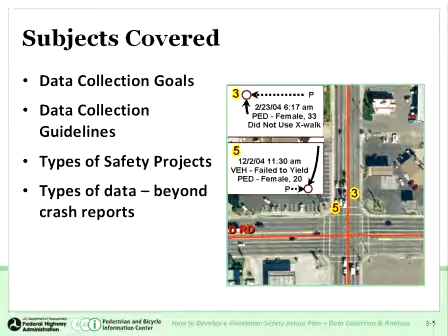Then we have a module on obtaining funding. Where might the funding come from in order to pay for implementing some of these countermeasures, particularly engineering, but also other education and enforcement measures. And then the fact that we need to implement and evaluate the different countermeasures. And all of this is part of an agency's overall pedestrian safety action plan.

So anyway, as part of that, and dealing with collecting data, we need to understand that to really boil all this down into some manageable units of analysis, we like to talk about crash data and looking at pedestrian crashes, where they occur and some of the characteristics, and then locations with a high crash potential. These two goals make up what agencies are supposed to have as part of their overall safety goals, to identify crash problems and then locations and issues that potentially could lead to crashes if we don't do something about it

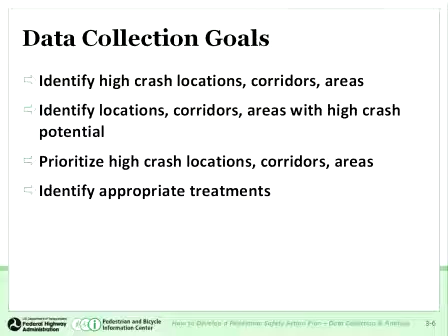ahead of time. So we are going to be talking about high crash locations, corridors, and areas or neighborhoods. These are sort of the three units of analysis that we deal with, not only in collecting and analyzing data, but also in selecting countermeasures. For example, for intersections or spots and corridors, we often talk about different kinds of engineering treatments that can be implemented. When we talk about areas or neighborhoods, oftentimes we may be talking about educational types of programs or even enforcement. But certainly all three of these types of measures are essential ingredients in having an overall successful pedestrian safety program.

All right, some general data collection guidelines that we've come up with are, first of all, we want to encourage everyone to make sure that you conduct your site visits, your field visits, to observe what's going on in terms of behaviors by the pedestrians and motorists, bicyclists, other road users, so you can really get a better handle on why things are happening, why are crashes happening, or why are you getting complaints from citizens about safety problems here. Then only collect what you need. We need to use our limited resources wisely and efficiently for collecting and analyzing data. And so we only want to collect what we can use.

Generally, when you talk about looking at pedestrian crash analysis, you want to collect between about 3 and 5 years of previous pedestrian crash data. If you go much further back than that, sometimes conditions have changed, say from 8 or 10 years ago. So that may not be as useful as your more recent 3 to 5 years of pedestrian crashes. Also, using the crash data certainly is important to help you identify where crash clusters are occurring, whether it's spots or corridors or areas. But then when you get into looking more specifically at some of the high crash locations, that's when it's important to get your hands on copies of the police crash reports themselves. Because reading those police crash reports can also give you helpful information on what's been going on, what kind of situations were occurring, and that can really help you understand the problem and select the appropriate treatment.

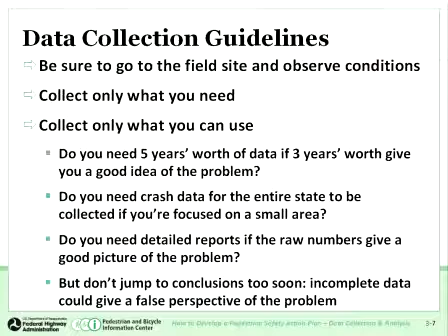And we also add at the end of this slide, we say don't jump to conclusions too soon. Sometimes we may see a few crashes and say, oh, I know what the problem is, but really be patient, go and observe the site, look at the other information, the traffic volume and speed data, other characteristics of the sites, look at the geometrics, and then you can have a better chance of understanding the problem and selecting the proper countermeasure.

Other data collection guidelines: we don't want to miss out on our most recent few months of pedestrian crash data. So if you can get data that's fairly current, you're better off. It's also useful to go back, as I said, at least 3 to 5 years, make use of information from citizen complaints, from police officers, from input you get from other people within your departments. And particularly crash data for the last 3 to 5 years are essential in better understanding what's going on with respect to new businesses in the area, new activities by pedestrians and motorists, the current user groups. Is it near a school? Is it near a senior center? Different travel behaviors by motorists as well as pedestrians. So you want to be able to capture the last few years.

In terms of the types of projects, we are going to talk for a minute about what kinds of data to collect at our intersections or spots or corridors, our neighborhoods, but also within the entire jurisdiction, because there are some kinds of problems that may be common within an urban area. Like if you're in a city within Florida, for example, you may have a high percentage of your population that's senior pedestrians and senior motorists, and that may result in certain kinds of behaviors that may be addressed through education or through some other kinds of engineering or enforcement measures.

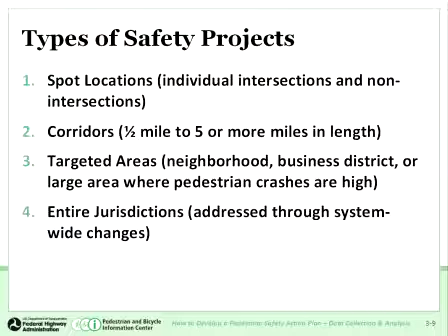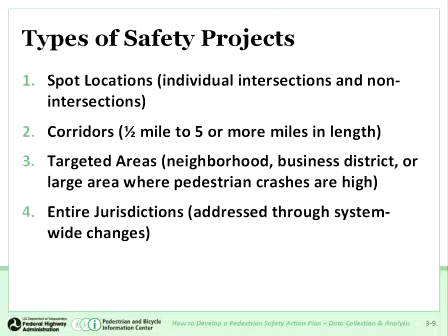Now, some of the types of projects we can talk about: spot locations. When we go out and start looking at sites that either have several pedestrian crashes at intersections like this, or maybe a series of complaints from citizens or others that there are speeding or lack of yielding or unsafe behaviors, we might want to be looking at things like sight distance or the width of the crossing. How many lanes does a pedestrian have to cross from curb to curb?

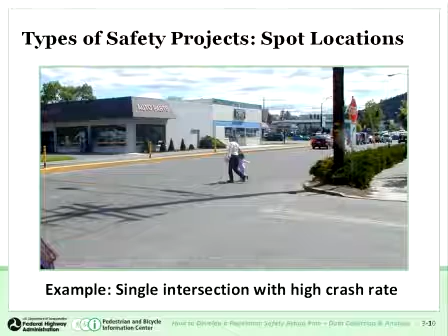Is there any raised median? What are the speeds there? Can we get speed studies? Are speeds too high? Could things be done to lower speeds, either through engineering or enforcement? What about the behavior of some of the users? Is it near schools? Are there children or seniors or other kinds of groups that you may want to address either through education or through some other kind of treatment?

When you talk about corridors, you can see here that there's really no obvious location to add a pedestrian crossing. You can see the pedestrian near the top of your screen standing in the center of this 7-lane roadway, and it may take quite a bit of analysis to figure out what is really needed here. There may not be one location along here that may warrant a traffic signal or even another designated pedestrian crossing. But are there other things that could be considered, like having raised median islands

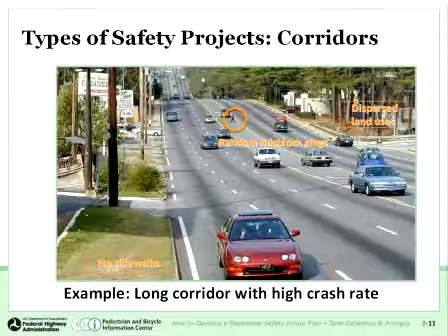or some other kinds of devices to slow down vehicle speeds, maybe reducing the number of lanes through what we call a road diet improvement. Maybe you don't need 7 lanes here. So next time you resurface the road, maybe it can be striped for 5 lanes, possibly with a raised median island for pedestrians to have a place of refuge. So we need to be thinking broadly, even during the data collection process, about the kinds of behaviors and conditions there that might lead to some reasonable countermeasures for pedestrians.

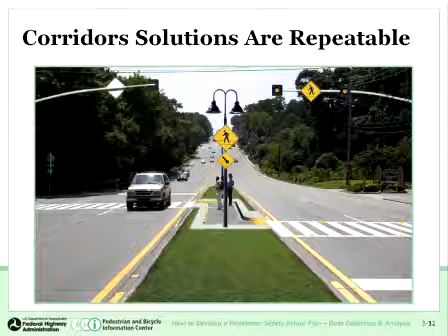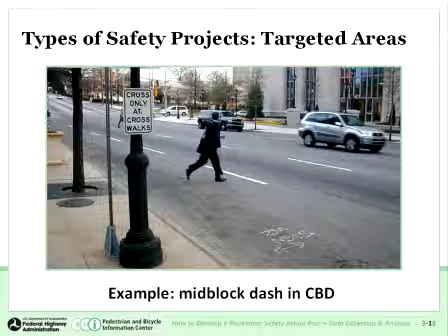There may be areas within an urban area, for example, like this, where pedestrians are running across the street for one reason or another, where there are long distances between signalized crossings, where it's important to really go out and collect just some basic information to understand what's happening. What are the pedestrian origins and destinations? Where are they crossing? Are there things that could be done to make these crossings safer? And what kind of data do we need to collect to help us come to those conclusions?

So a pedestrian may not be able to even see the indication that the motorists see, and a pedestrian may be sort of guessing when it's safe or appropriate to cross the street. So if you have senior citizens or children in particular, that may cause a certain risk for pedestrians, particularly during higher volume conditions or in rush hour.

So looking at intersections like this throughout an urban area where you may have multiple signalized intersections without pedestrian signals, are there some policies or some priorities that can be placed on installing pedestrian signals, you know, where they're needed?

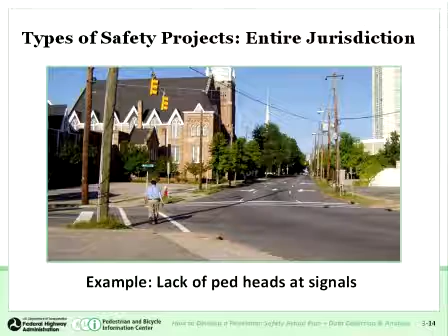Unfortunately, though, in terms of exposure data, many cities don't collect much exposure data. We encourage them to do so. Pedestrian exposure can be very useful in conducting a citywide or area-wide analysis of pedestrian safety. But what we're saying is you shouldn't necessarily wait for all the exposure data to be available before you start with your pedestrian safety program.

It can be useful in computing pedestrian crash rates and things like that, and determining where there are demands for pedestrians, where you can meet certain warrants, like for traffic signals and pedestrian signals, and where there's a need for crosswalks and other crossing amenities.

The other item here says that if a pedestrian safety problem has been identified, you can decide what kinds of data are most needed for that site, so you can begin selecting the appropriate countermeasure and implementing those countermeasures as soon as possible.

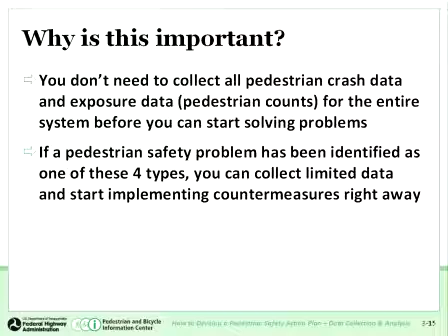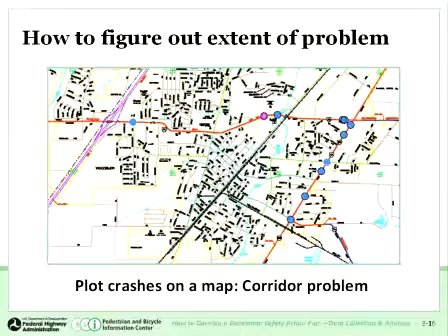And so by looking at an overall visual picture of where the pedestrian crashes are occurring, that can really help you hone in very quickly on where you need to go out and further analyze stretches of highway corridors in this case, and determine what problems are occurring and what countermeasures may be appropriate.

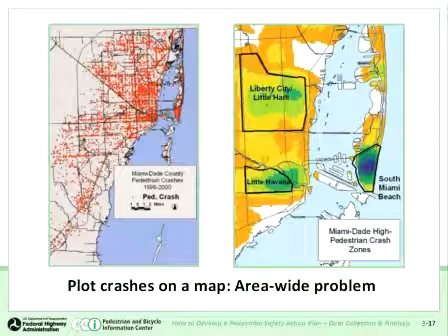And then what we did is we went out into the field, we looked at these sites, walked through them as pedestrians, we drove through them as drivers, and we could get a better sense of what's going on. We also observed pedestrians and motorists for quite some time, to see what may be causing some of the crash experience.

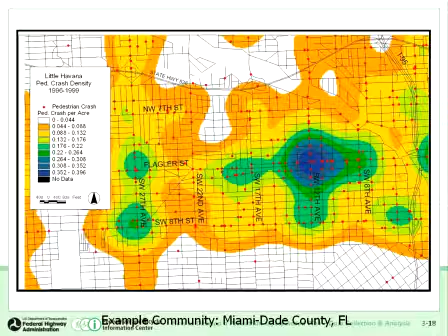Collecting the data to analyze pedestrian crash problems involves several kinds of things. We talked about computerized police data, and we recommend that be geocoded so that the analysts can develop computerized crash maps and quickly be able to target the locations that need further analysis. But in addition, it's important to have some kind of information on the conditions of the roadway, number of lanes, types of traffic control, things like that, as well as the location of sidewalks and walkways.

Knowing the traffic characteristics, traffic volume, the characteristics of turning movements, and percentage of vehicles by type. Pedestrian counts and behavior information is useful, and this should be done at the sites where you go for further inspection. It's important to understand the pedestrian guidelines and policies that your agency has. And are some of these policies contributing to maybe some of the pedestrian crashes?

Are your walk signals timed properly to allow enough walk time for pedestrians? Do you have well-trained adult crossing guards at your elementary schools where appropriate? Do you have an adequate network of sidewalks and walkways for your pedestrians? And certainly making a site visit can help you to understand the answer to some of these questions.

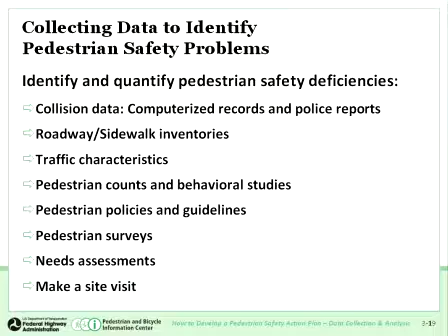Now, getting into a little bit more detail on the collision data, it's important that we do have a full picture of the pedestrian crashes, when they're occurring. We need to get copies of the police report, to read the narrative when we're looking at a location, to review what the officer said about each of the pedestrian crashes. And again, geocoding the crashes is a good first step in targeting where the crash locations are.

When we were further analyzing the pedestrian crash problems in Miami-Dade County, we actually had copies of the police reports sorted by intersection along a corridor. So as we would walk along a corridor, we would stop at an intersection, we would pull out the crash reports for that intersection and review them right there in the field. And then by looking at the intersection, watching the behavior as we reviewed the crash reports, we could really start to understand why certain kinds of crashes may be occurring.

Was there a high left turning movement combined with heavy pedestrian crossing across a certain leg? Were there certain behaviors by pedestrians like walking against the light, or motorist behaviors like speeding or failing to yield that might be contributing to crashes?

There were a couple sites where we even noticed from the police reports that the crashes were occurring in a grocery store parking lot, because it was actually drawn on the police report sketch. So we actually went into the parking lot and watched the flow patterns of the motorists and the pedestrians coming into and out of the store, and it was really obvious they had a very bad flow pattern with poor sight distance, and that was clearly contributing to some of the pedestrian crashes.

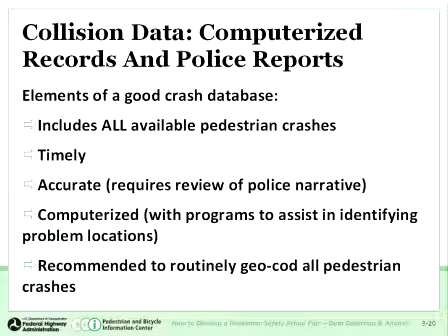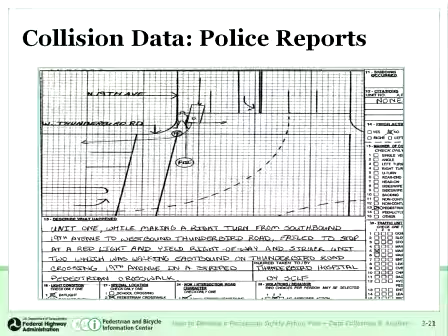And you can see here an example. Looking at this sketch, you can see the right turn motorist that struck the pedestrian that was stepping off the curb. So, what's going on out there? Looking at the site, was there a poor sight distance, or was a motorist looking to the left and not observing pedestrians crossing in front of them? Or are there other sight conditions that might be contributing to this kind of crash?

Now, in addition to having the crash data, it's important to understand where there are missing sidewalk links. Do we have maps or information on traffic flow, the average daily traffic, the street widths? Because we know that wide streets and heavy traffic and high speeds, those combinations of conditions can really present high risks for pedestrians trying to cross.

So also having some idea of pedestrian counts, the ages and characteristics of the pedestrians, how many are crossing, where they're crossing, can also be an important ingredient in your analysis.

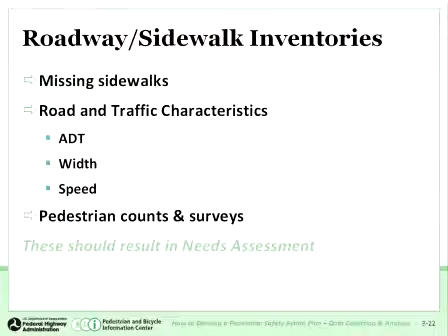And looking at locations like this, where you may have missing sidewalks, and it's pretty clear that if you have crashes occurring during a certain time of day, it's important to go out there during that same time and day of week, if possible, or if it's a weekday problem or a weekend crash problem or a nighttime crash problem, and go out and look at what's going on during those days or times of day, and that can really help give clues as to what is causing some of those crashes.

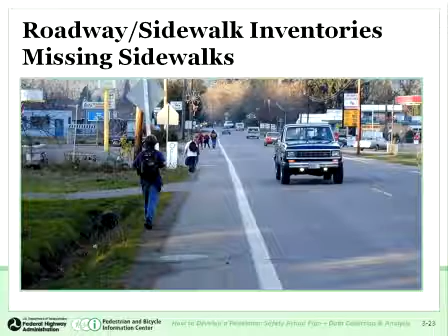Okay, now here's an example of a street, and if you're going out to look at a site maybe that's had a lot of complaints or pedestrian crashes or both, it's important to look for things that may be going on that you can just observe from your vehicle or from standing in the street. Just to give you some examples of things we observed in one of our citywide studies, we had several pedestrian crashes that occurred on a two-lane, fairly low-speed street that divided a pedestrian mall. And so it wasn't really clear to us from the police reports why these crashes were happening.

When we went out into the field, we noticed that every cycle, the walk and don't walk signals would come on at the same time. Now, the engineers told us when we got back to the office that was impossible, but we took photographs and showed him that that was indeed happening.

We had other locations with motorists striking pedestrians on the sidewalk. And we went into the field and noticed that the bushes between the sidewalk and the properties had grown up so tall that motorists exiting the driveways couldn't see a pedestrian until they actually had the front end of their vehicles across the sidewalk. So this was an obvious thing, trim the bushes.

We had another city where we had a lot of pedestrian crashes happening at certain intersections along a major route. It so happened that these were primarily where the buses were stopping, and we would observe pedestrians running diagonally across the street to the bus or getting off the bus, stepping out from in front of the bus into the path of oncoming traffic. So it's really a matter of issues concerning behaviors at bus stops and what are some of the things that could be done to change behaviors or implement engineering treatments there.

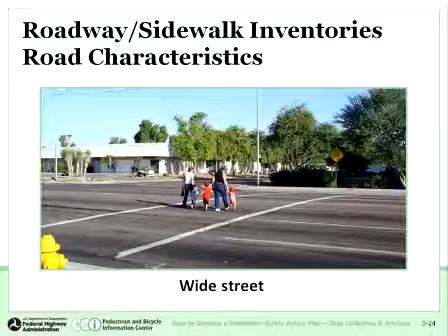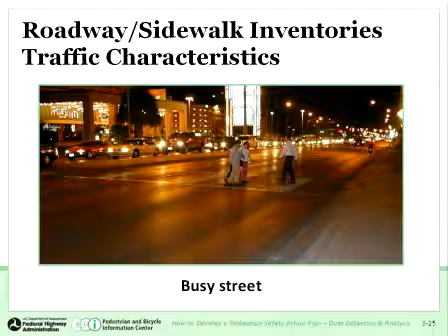You can go out at night and observe certain kinds of behaviors like you see here. You know, are speeds high? Are pedestrians crossing the street at certain locations without looking? Is this even a proper location to have a marked crosswalk alone? Or should there be some other enhancements here to assist pedestrians crossing the street? In many cases we can really understand a better solution simply by observing.

Some of the behavioral studies that we might want to conduct is just observing at a location can lead you to understanding what are the problems. There was another location in one of the northern states not too long ago. It was near a junior high school, and there have been several junior high school kids that have been hit by cars during afternoon school periods.

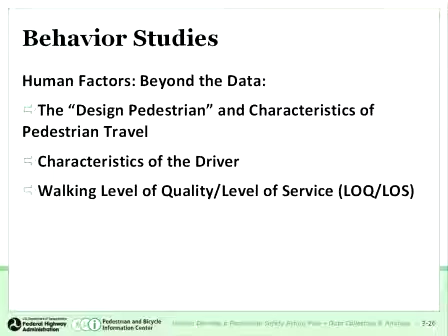And we noticed by observing that they had one older adult crossing guard that was being ignored by the junior high students. They would cross when the guard would tell them not to. The motorists were ignoring the guard and driving right through even though the guard was telling them to stop. And it was really chaos. And it wasn't very difficult to understand why pedestrian crashes were happening. So a number of treatments were recommended there to really try to get control over the situation.

Also looking at what's going on in terms of where and how pedestrians are crossing and how are motorists behaving. When we were in Miami-Dade County and we went to some of the neighborhoods to look at behaviors on some of the high crash corridors, we were in one area called Little Haiti, and we would notice that many of the senior pedestrians would cross these wide 4-lane, 5-lane streets, and they would stand right in the middle of the roadway waiting for oncoming traffic to pass. And many of the vehicles were passing within a foot or two of them as they stood in the middle of the street, and then they would finish crossing mid-block.

We noticed that in some of the areas, very different kinds of behavior. Some of the behavior by the children in Little Haiti and Liberty City were really putting them at risk in terms of running across the street or crossing in unsafe ways, motorists not yielding to pedestrians in crosswalks. So that kind of behavior is important to note to help you understand what countermeasures are appropriate.

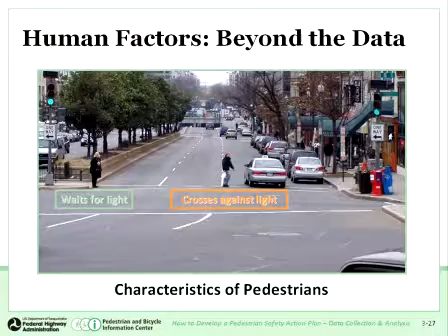We have looked at pedestrian crash problems in many urban areas, and what's common is some pedestrians may walk against the don't walk light, and at the same intersections, motorists may not be observing the legal right-of-way that pedestrians have during the walk phase, and maybe turning left or right across the pedestrian's path. So sometimes enforcement is important, particularly to motorists, to improve their behavior to comply with the speed limit and also with laws requiring them to yield to pedestrians in legal crosswalks.

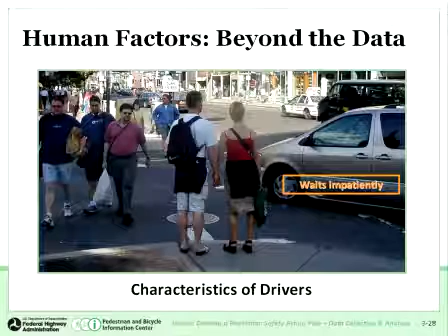Also looking at a roadway situation or corridor that may not be very pedestrian friendly, looking at the quality of the environment for pedestrians, the walkways or sidewalks. Are they being cleared of snow and debris or ice? Do we even have adequately designed sidewalks and walkways for pedestrians? And what about the pedestrian crossings? Are they built in a safe manner for pedestrians to use them?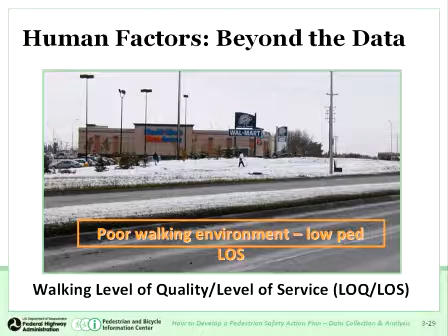And one of the things that we do know from the research is that many of the improvements that benefit pedestrian safety also benefit motorist safety. For example, road diet improvements we've made mention of, where you're reducing the number of lanes from 4 or 5 lanes down to 3-lane roads. Our research shows that crashes can be reduced by about 29% for total crashes. And some of the research we've done for pedestrians on marked versus unmarked crosswalks shows that having fewer number of lanes also reduces pedestrian crash risk.

Just a few other examples of some of the treatments that can improve safety for all road users that can benefit pedestrians. Adding raised median islands gives pedestrians a place of refuge, can reduce pedestrian crashes by 30 to 40%, but also reduce motor vehicle crashes, particularly head-on crashes and left-turning crashes.

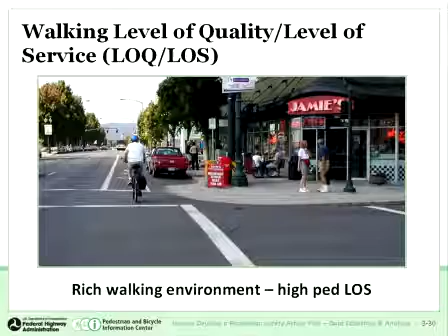So something to keep in mind. Okay, getting into a summary of data collection. Again, we want to think about the spots, corridors, and neighborhoods, as well as jurisdictional issues and problems. We want to make sure to have pedestrian crash data 3 to 5 years. We want to observe pedestrian and motorist behavior in the field and collect basic roadway inventory information, as well as our traffic and volume information and our crash data.

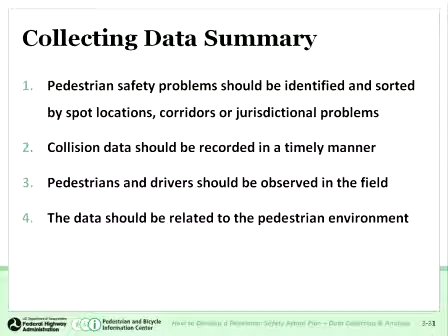But also realizing that you don't have to collect every single piece of information that you would ever want in order to oftentimes identify what is the problem and have that lead to countermeasures. Okay, so essentially we're wrapping up this first module, and we've talked about what and how to collect meaningful data for pedestrians as part of their pedestrian safety action plan.

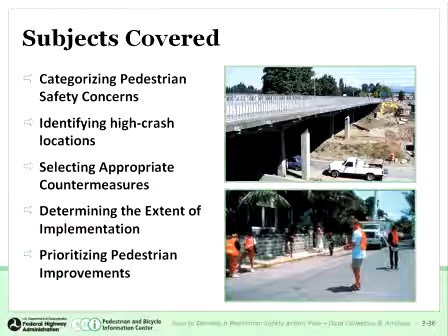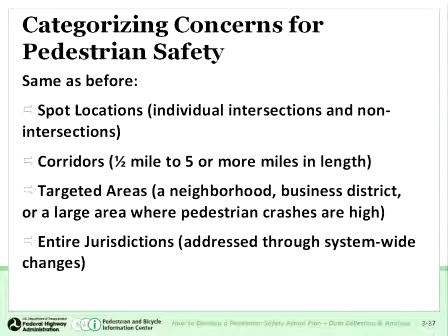And we are going to talk about not only looking at high crash locations and a little bit about some of the countermeasures that may come from some of this analysis, but we want to also talk about the extent by which you can implement some of these treatments, and then the importance of setting priorities for implementation. We know we don't have unlimited funds. We need to make use of the resources that we have to do it in a cost-effective manner. And we are going to look at, again, spots, corridors, areas, and jurisdictional issues.

One of the tools we can use to analyze pedestrian crash data is what we call PBCAT. It's Pedestrian Bicycle Crash Analysis Tool. It was developed largely by the Highway Safety Research Center here at UNC for the Federal Highway Administration, trying to analyze crashes in terms of the type of crash. Things like mid-block dart/dash, turn merge, where they're left-turning or right-turning motorists, walking along roadway crashes, like often occur at night, and trying to take our sample of pedestrian crashes, analyzing them by type, and then this software allows you to not only enter the basic data, but it also has links to appropriate countermeasures for each crash type.

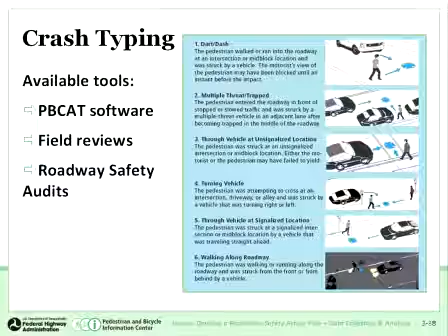Here's just an illustration of what the PBCAT software looks like. We have this information on our website.

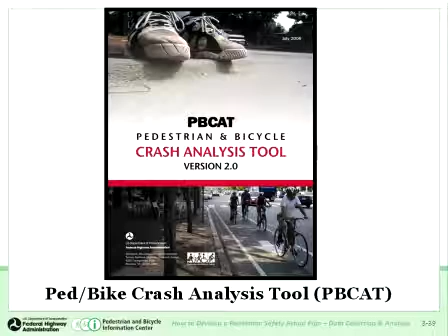This is the PBCAT software, and it allows you to really analyze crashes in a systematic manner in selecting countermeasures. The field reviews, we talked about those some, but we need to summarize the data, whether it's conflict data or you want to analyze the percentage of pedestrians that walk during the walk, flashing don't walk, or steady don't walk period, in terms of reviewing data from the motorist, in terms of speed data, yielding behavior.

And we want to review the site of the crashes or the complaints, not only from the standpoint of behaviors, but also characteristics of the sites, the number of lanes, the speed limit, vehicle speeds, types of traffic controls there, and things of that type. And of course, more data will be needed for sites that are more complex to analyze and have more difficulty in determining the cause.

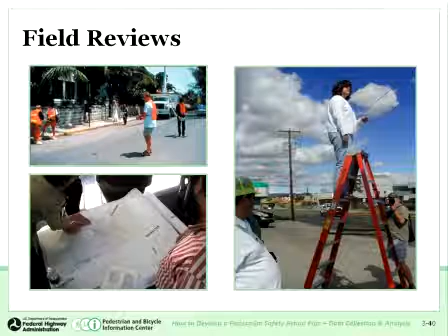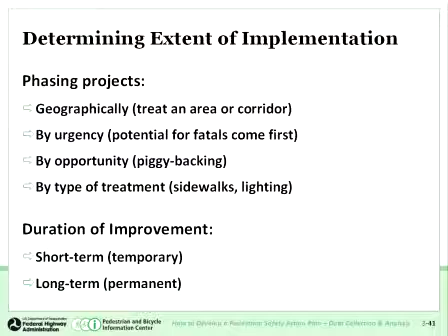We also want to talk about the phasing of implementation, that there are some kinds of treatments that will be discussed in some later webinars that can be phased in throughout an area or neighborhood or along a corridor. We talked about reducing the number of lanes from 4-lane to 3-lane. We can talk about some geographic treatments like educational programs that can be implemented at schools or senior centers.

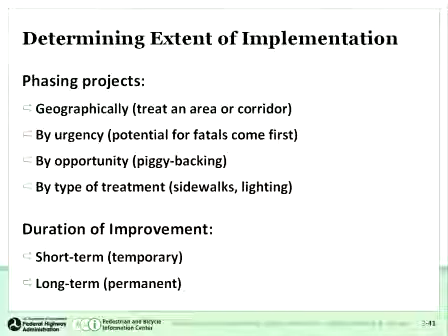We can talk about piggybacking projects where if you're going to have a construction project, here's an example of where an agency installed a number of curb extensions along a corridor. They were actually having a utilities improvement anyway, so they had to tear up the street, and as part of the reconstruction, they decided to install a series of curb extensions which shorten the crossing distance for the pedestrian at certain intersections, and they can also help to reduce vehicle speeds.

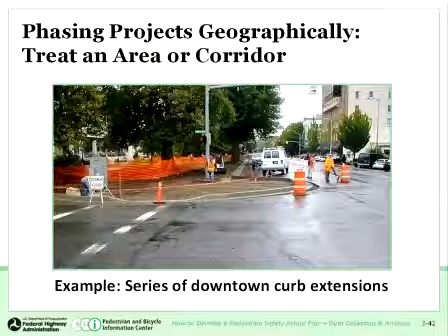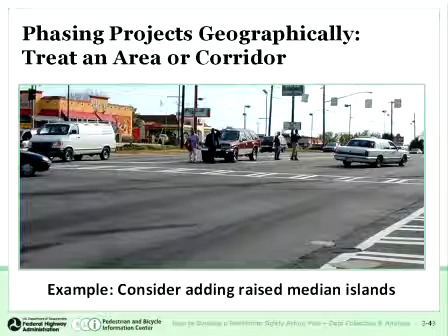Things that can also be done as part of a system-wide improvement are things like different engineering treatments. The city of Orlando, for example, a few years ago decided to systematically replace all of their parallel line crosswalks with high visibility crosswalks. So they decided to phase out the parallel lines and put in the more visible crosswalks. And they actually thought they saved money in the long run because the higher visibility crosswalks lasted so much longer. So you can make implementation of some of these treatments on an area-wide or system-wide basis throughout your city or town.

Other treatments like adding a bridge. Well, that's a great opportunity to add your sidewalk or walkway for pedestrians, because otherwise if you build a new bridge and don't put it in, then it probably is not going to be ever added to the bridge. And you want to make sure that pedestrians are provided on bridges and other facilities to reduce the chance of collisions in the future.

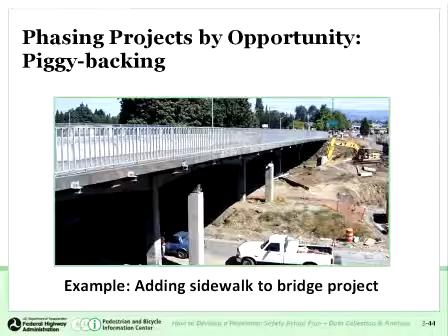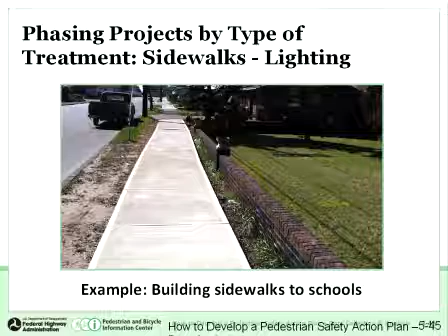Or sidewalks and lighting. These are two essential elements for pedestrian safety. We say that having a well-planned network or system of sidewalks and walkways is kind of the backbone of a pedestrian transportation system. If you don't have them, then your crashes go up, pedestrians walking in the roadway, motorists are having to contend with pedestrians at night, during the day, and really can cause problems to all the road users. Having lighting is certainly important along corridors where there is nighttime activity, and it can really reduce nighttime pedestrian crashes, as well as motorist nighttime crashes.

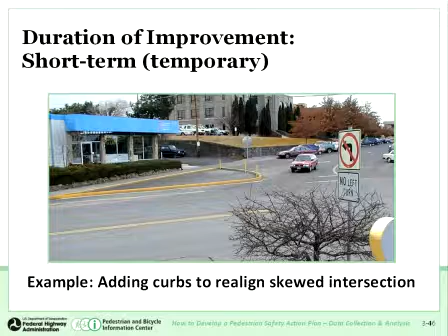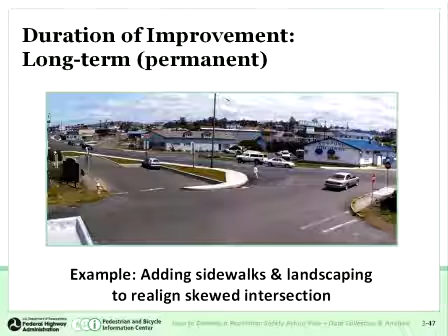Here's another example where this agency extended the sidewalk. So what happened is it really resulted in a much reduced width of your driveway opening. Again, it shortened the crossing distance for that one pedestrian crossing there, and motorists are approaching at a right angle, and they can see much easier to the left before turning into the major roadway.

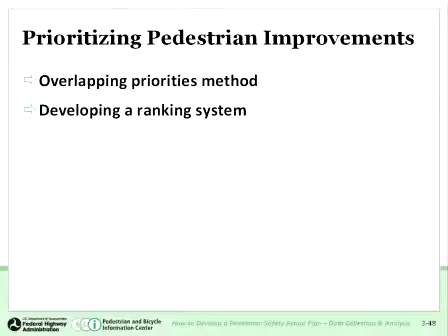So one of the questions is, though, all right, we have so many needs there. We have so many sections without adequate sidewalks. How do we manage this? What are some of the methods we can use to set priorities for implementing treatments? So what I'm going to do is talk about an example from Seattle where they had sort of a daunting task of so many missing sidewalk links. How could they manage this, if they don't have all the information they would like on pedestrian exposure and other data in any kind of format to really make any kind of rigorous analysis?

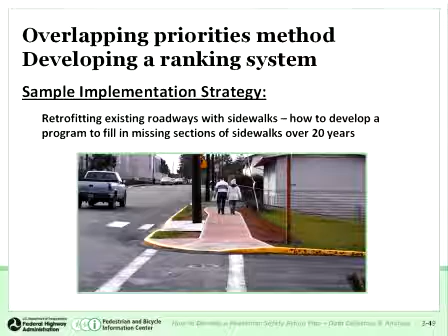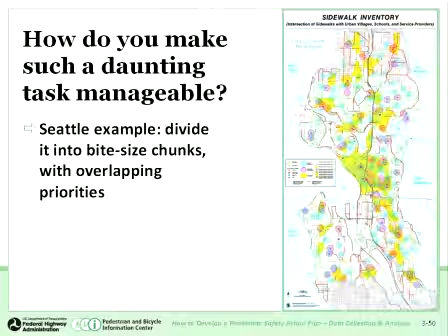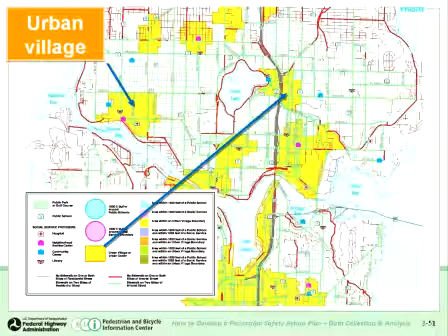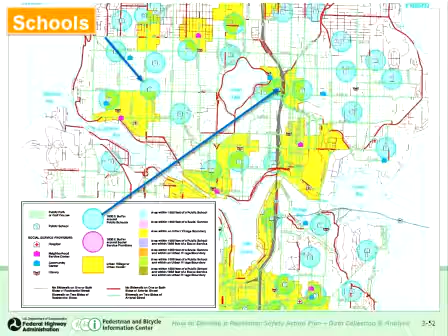So what they did is they decided to take the map of their city, divide it up into bite-sized chunks, and then try to establish some overlapping priorities. And what do we mean by that? Well, you can see here they have located the urban villages in the yellow there, where a lot of activity should be, from retail, commercial areas where pedestrians might be expected to go to buy goods and services. They superimposed the area around schools. You can see here in the blue circles where the elementary and middle schools were. Then they superimposed on top of that where the service providers are: post offices, gas stations, restaurants, libraries.

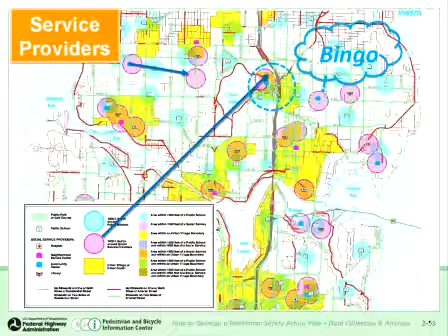And where these three areas overlap, it says bingo, these are the highest areas where they would identify to add missing sidewalk links. It's fairly easy to do, and so now they have set priorities for adding sidewalk links for priorities 1, 2, and 3 over the next 10 years or so. And so can they make all these improvements right away? Of course not. But what they can do is set some reasonable priorities for making improvements to do the most good first.

Now there are other methods like this. This is from one city that established some criteria for a rating system, like the severity of the problem, the effectiveness of the solution. Is it going to be high effectiveness, or low?

What is the probability of use or the travel demand by pedestrians, the likelihood of funding, how feasible is it to be done in conjunction with other projects, what about public support, how much does it cost? So anyway, just setting up a kind of a simple priority rating system. And so you rate every potential project on this 100-point scale and then order the candidate projects from highest to lowest points, and then do those projects first.

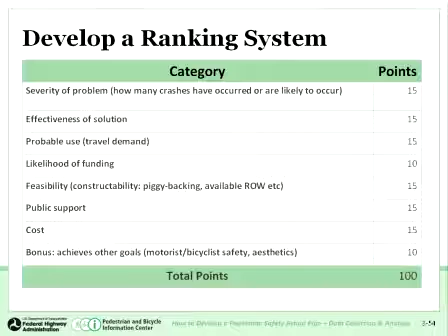Another option is to use kind of a cost-effectiveness method, where if you can determine the estimated effects on crash reduction, and then can apply that to determine a crash savings in terms of dollars saved divided by the cost of the improvement, and then order the projects by benefit cost ratio. So there are different methods to do that. But whatever method you use, try to find the places that have the most crash problems or most crash potential, and where you can do the most good quickly.

Sometimes it's not so quick. You can try to set up a time frame for making improvements, especially if they're major improvements. But we really want to try to address as many of the problem sites as we can, either through engineering, education, or enforcement. So in summary, for the analysis part, we want to, again, identify types of locations that we should look at in more depth to collect and analyze data to ultimately reduce the most pedestrian deaths and injuries that we can.

And we want to set up a schedule to implement them, whether it's as part of other planned projects, other reconstruction projects or other utilities projects, or even from routine maintenance. There's much we can do, or setting aside safety funds for making improvements, and trying to think about our system as a whole and how we can get the most bang for the buck.

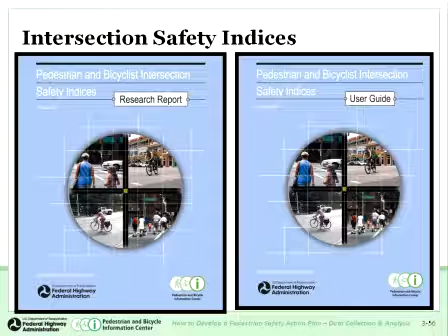Now I'm going to run through just a few examples of some resources that might be appropriate to go along with some of these recommendations. This is sort of a method that we developed here at the UNC Highway Safety Research Center called the Intersection Safety Index. You can see the cover of the guide for the pedestrian and bicycle intersection safety index. But it's a methodology. We have a research report on the left and a user guide on the right.

And it allows you to rate intersections based on a 6-point scale, where a 1 or 2 rating means that it's really safe for pedestrians, a low volume, narrow street, low speed, where even children could probably cross there at a certain age without a lot of risk, up to the higher numbers, 5 or 6, that mean they're so dangerous, wide streets, high volume, high speeds of vehicles, very difficult to cross. But you can apply this method fairly easily and quickly to literally hundreds of intersections, say in your downtown area or suburban area, without having to wait for crashes to happen.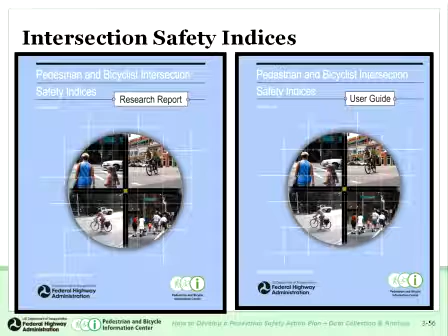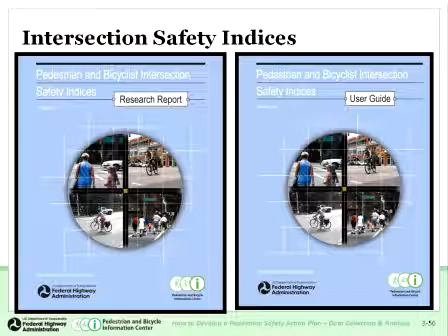Remember earlier we talked about wanting to meet 2 goals. One is to reduce crashes where they occur. Secondly, to identify the potential for crashes and try to treat those sites before crashes start happening, if we know that there are potential high-risk problems there.

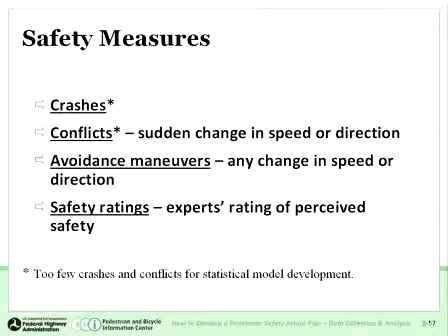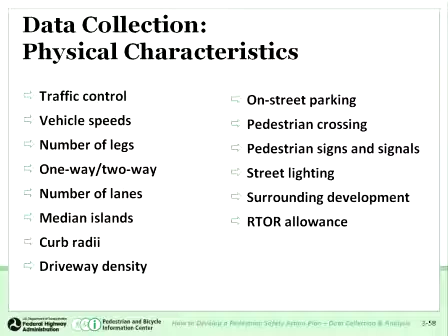So just to give you an idea very quickly of what this system does, this intersection safety index, we try to use crashes, conflicts, avoidance maneuvers, and safety ratings, where we had many experts around the country rate different intersections in terms of how safe they would be for pedestrians. We were able to use safety ratings and avoidance maneuvers by pedestrians in particular and other behaviors to merge with site characteristics like traffic volume, number of lanes, curb radius, driveways, pedestrian signals, lighting, other issues like this, and come up with kind of a method.

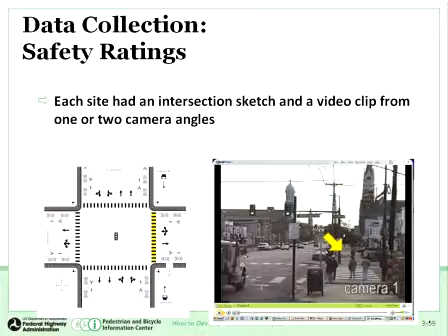You can see here we would use sketches and videotape, like you can see illustrated here, that our team of experts around the country would rate these intersections 1 to 6, and then based on the characteristics of those intersections, we came up with a model that identified certain factors as associated with higher risk for pedestrian crashes or for potential crashes.

Things like higher number of lanes, higher vehicle speeds, higher traffic volume in conjunction with traffic signals, commercial areas. These are all factors that, when they were present, were associated with higher risk of pedestrian crashes, of potential crashes, and therefore higher ratings on this 6-point scale. Now, factors like the presence of a signal alone with ped heads, or stop signs, things like that that would interrupt traffic flow were associated with lower crash risk.

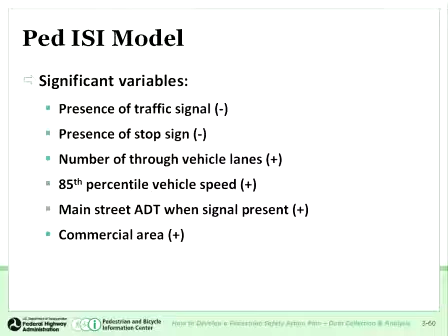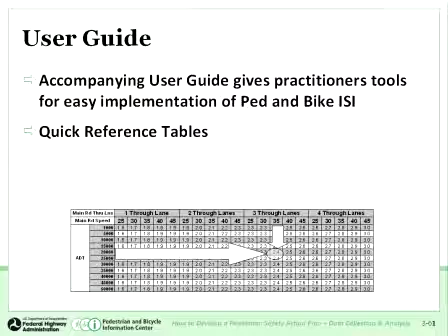So basically, without going into too much detail on how we developed the method, you can either use a spreadsheet or we have a quick reference table series where you go into the user guide. You enter your number of lanes. Your traffic volume here, let's say it's 22,000. You can go over to the number of lanes, 3 lanes, 35 miles an hour, and you can see a rating of 2.4. So you can fairly easily use these tables with just a few basic data variables for an intersection to get a rating variable from 1 to 6.

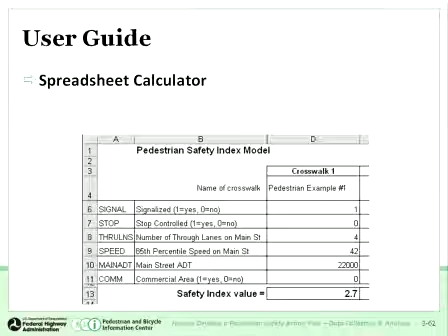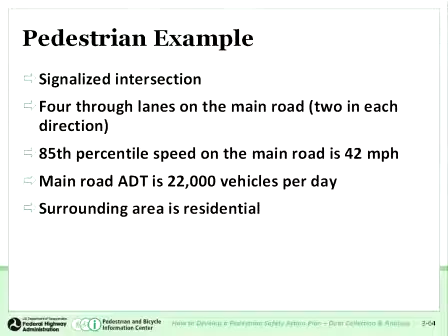So you can see here, you also have a spreadsheet calculator available. You can either use a spreadsheet or you can use the series of tables. Here is an example: you might go out to a site and enter the basic information. This site is a 4-lane signalized intersection, 42 mile an hour 85th percentile speed, 22,000 vehicles on the main line, and it's in a residential area. And this came out with an intersection safety index of 2.7. You can also use the chart to come up with the same number.

So basically it allows you to apply this method to hundreds of intersections throughout your city and then rate them from the highest numbers to the lowest numbers, and then take a further look at the ones that have the highest ratings, whether they had any crashes or not, and make use of this method in conjunction with your crash data, where you've identified high crash locations, and then use the two methods to go out and investigate, see if there's problems, and then come up with feasible solutions.

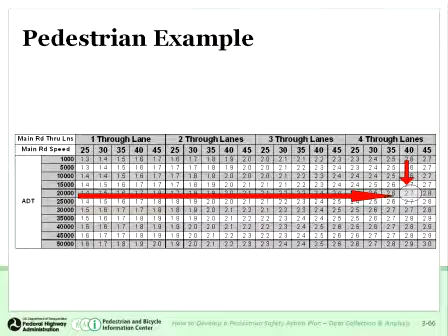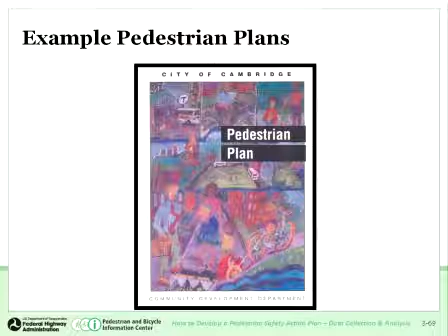There's another resource we call the FHWA Resident's Guide, and it's really geared more for citizens and neighborhood groups. It's a user-friendly guide to allow you to identify problems and solutions. And Davian mentioned this briefly at the beginning of the webinar: there's a course that gets more into the design and traffic control features of a roadway. We call it the Designing for Pedestrian Safety Workshop.

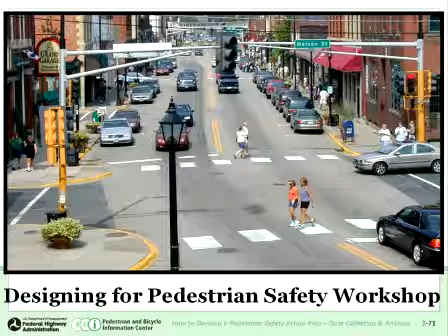And so essentially, the learning objective of this session was to allow you to integrate some of the data collection and analysis components of your pedestrian safety plan. This is going to help lead to the appropriate countermeasures, and some of those sessions on countermeasures will be coming up in the next few weeks. So that's an overview of the presentation.